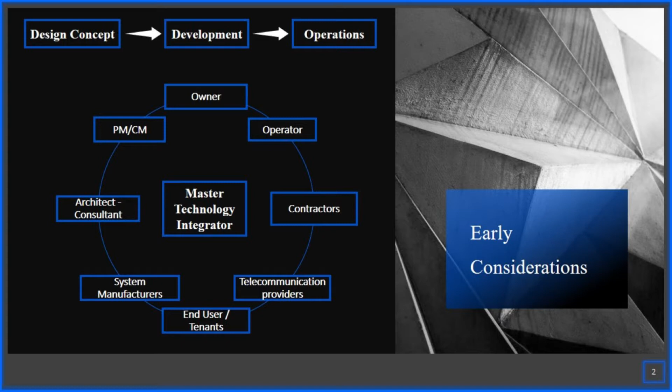And it is actually the deployment of a master technology integrator in the early phases when we are doing the planning and the design concept of the building. The master technology integrator is going to interact with all the stakeholders within the project in order to set a specific roadmap for the intelligence of the operation, including the digital twinning.

And they're going to start looking into the entire details of the infrastructure, the network diagrams, the integration which is going to happen between the different systems within your building, and they're also going to look into the future expansion of any of these systems. So the roadmap will be based on a short-term and mid-term for the state-of-the-art technologies available within the market, and also future-proofing for your building to be able to implement any future requirements.

And one of the important points within their support to the development is actually the digital and cybersecurity. We are all talking about platforms, cloud-based platforms, on-prem platforms, and it will be accessible by many entities, several people, subcontractors, vendors, whatever. And we need to assure that there is a proper authentication system and cybersecurity or digital security for the entire implementation which we are doing.

It's worth saying that you need to get an engagement with whoever will be able to put you on the track. And the master technology integrator is really helpful in setting these strategies in the early phases.

Similar also to the hydronic model, and specifically talking about the digital twinning, we start from the BIM, and the BIM for sure is going to have a BIM execution plan. But will the BIM finally enable you to use it for your digital twinning?

You need to consider in the early phases within the BIM execution plan that you really need to get from whoever is going to develop your digital twin what the detailed specifications are, and provide them to the team who will be building your BIM model, in order to streamline the process of shifting from BIM, or the famous terminology BIM to FM, which we used to use previously, in order to be able to have it at the time when you are having the building operational.

One important point specifically regarding the digital twin is if you have a core and shell building, and most of the spaces are leasable spaces, you really don't want to end up with no visibility of your tenant spaces, how they are performing, what's happening. Or you come one day to examining how you're going to achieve net zero carbon or carbon neutrality, and you need information related to your tenants and the leasable spaces.

And you need in early phases to tell your tenants, I need something from you. I need you to provide a BIM model with the same specification as the building, so you can marry them together at the end. You need to ask them for their asset information entirely. You need to ask them to have an integration to your BMS system, but to a limit, not to inflate their fit-out cost, and utilities meters.

We know what we need from our tenants, and we planned for the extended utilization for other platforms. Let's get into some quick screenshots from an existing digital twin. So this is the platform which was used in order to integrate with the BIM, to do the integration between the 3D modeling and the information available within the building itself.

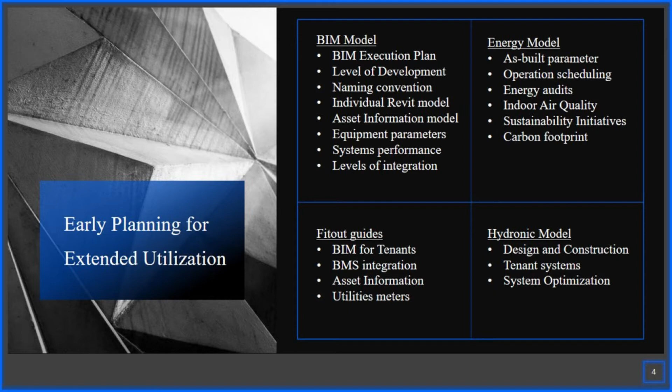Going deeper, on the slide of the BIM execution plan, there was a consideration related to how many Revit models we need. We recognized that once you give many people access to the digital twin, they may end up with a small tablet with limited specifications or RAM, and they need to see what they really need to see. So the initial request was to have different Revit models, which you will be able to turn on and off as needed, in order to ease the usage in the future for your team or for your vendors.

This is another snapshot which is actually showing most of the models on the platform, and this is the bird's-eye view for the summer garden of ICD Brookfield Place. Then, let's say there is an engineer going deeper. Within the BIM execution plan, there was a consideration about the level of development: how much detail you finally want to see. You need to plan this in the early phases.

And here, these details are available when you navigate into a system, let's say an air conditioning system. The initial decision about how it will look, how it is segregated, and how the systems are connected was made in the very initial phases and was overseen during the construction of the building. Then he goes deeper, and let's say he decides to click on a certain pump, and he will start to see the life cycle information related to that asset.

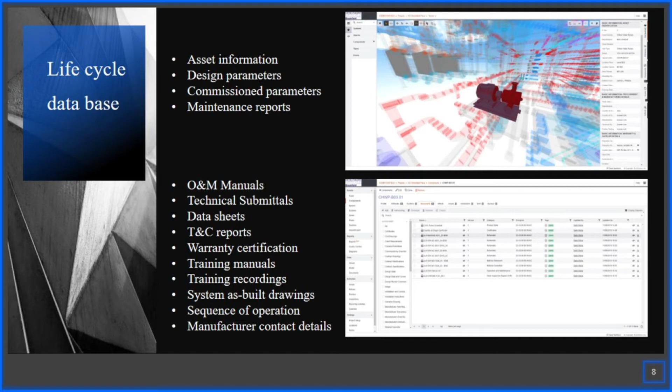And when we talk about the data of that asset: the actual design data, the actual commissioning data, and the maintenance reports related to this asset, and all the types of documentation which have been uploaded related to that asset specifically, even including the training recording related to that asset, in his hand.

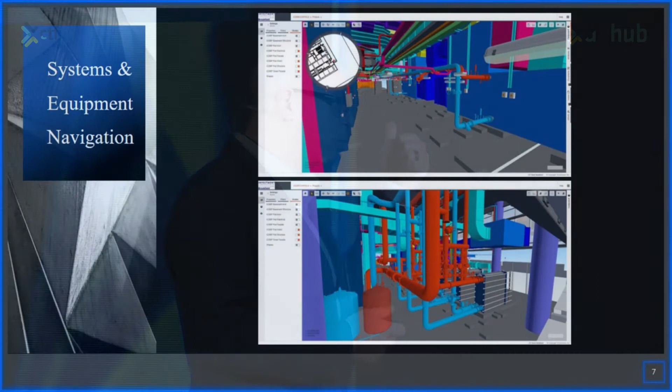Okay, now we talked about a passive build for a digital twin. Where are the live feeds? Where is the actual live data coming from for each equipment, or specifically for that pump, for example? What we plan to do is actually not to have a direct connection with the platform which takes the BIM to the FM, but to go to a higher layer, which is the central management platform. The central management platform connects with all the systems within the building, is connected to the energy model for the core and shell, and is also connected to the platform we have seen on the previous slides.

And then there is another layer of integration, which we talked about. Now we have full integration into what's happening within the leasable spaces, because we already asked them to provide certain information and a certain level of connectivity. Then another layer mainly relates to an expansion to the rest of the disciplines under operation, mainly the CAFM system, which will be responsible for the operation and maintenance scheduling for the building. Then there is an even deeper layer, which might include ESG data management software if your strategy includes starting to report your ESG.

So now we have a complete overview of the entire strategy and how it was set from the start. Where we are right now, we need to achieve efficiency during operation. We need to start reducing our OPEX. And what we ended up with is giving all the operation and maintenance team for the base building, all the operation team for the tenant areas, and all the property and facilities management complete access to the entire platform which has been built.

The central management platform, along with the BIM-based digital twin, is really going to facilitate the artificial intelligence concept and automatic fault detection within your building, which will really help the entire operation and maintenance team, whether related to your building directly or to your tenants, in a very intelligent manner.